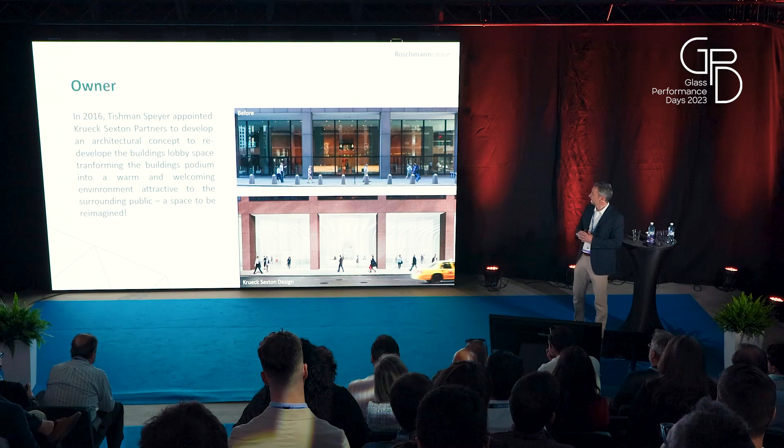So that's why they wanted to get it opened up. They wanted to get it as transparent as possible in order to get rid of any distraction which may also shade the light which is coming in. So that was their concept. And that was 2016. And 2016 compared to 1987, of course, from a material point of view, we do have different technologies of how we are getting to the point of creating those spaces with the least of the materials.

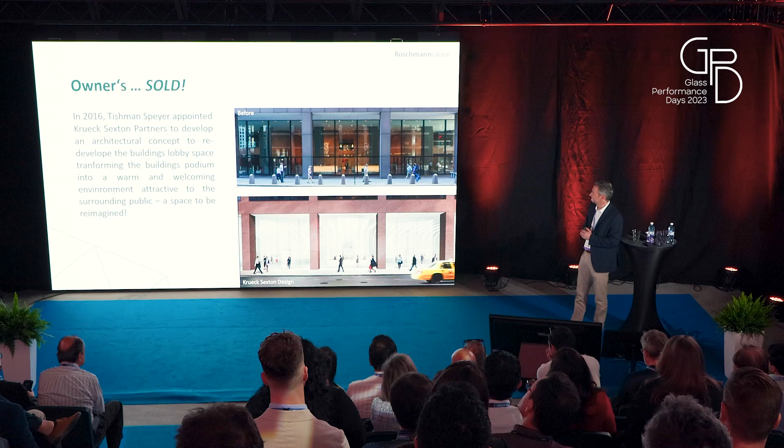He wanted to have a flow of public traffic going through the building and actually also using that space in that lobby as a collaboration space in order to get people into that lobby and collaborate rather than going up into the offices, but collaborate right at street level in order to have a space which can be used for several purposes.

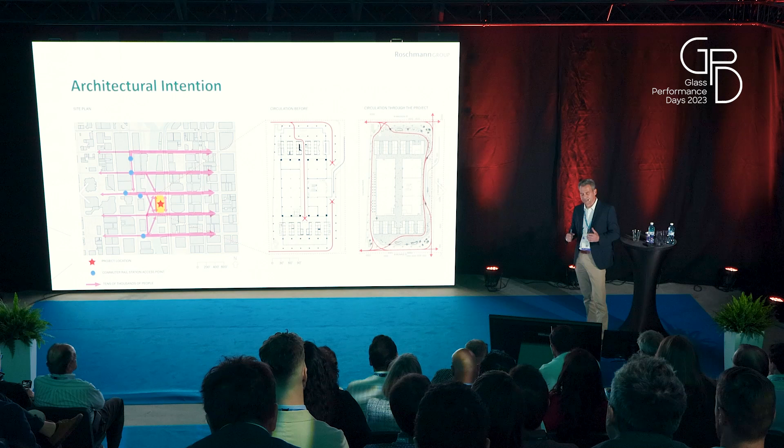So, the architectural design criteria which has been set was starting with a storefront which was not straight but kind of curved in order to create vibrance around that building. So this vibrance is pulling the people who are walking around that building closer to the building where it is becoming more attractive. So they were using curves in order to create this kind of shape.

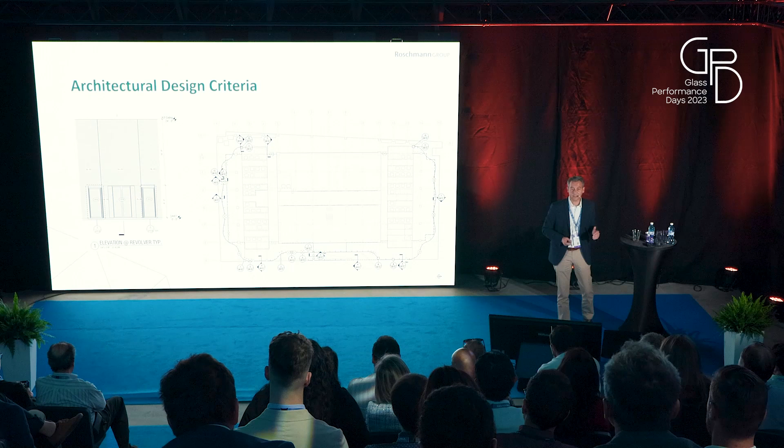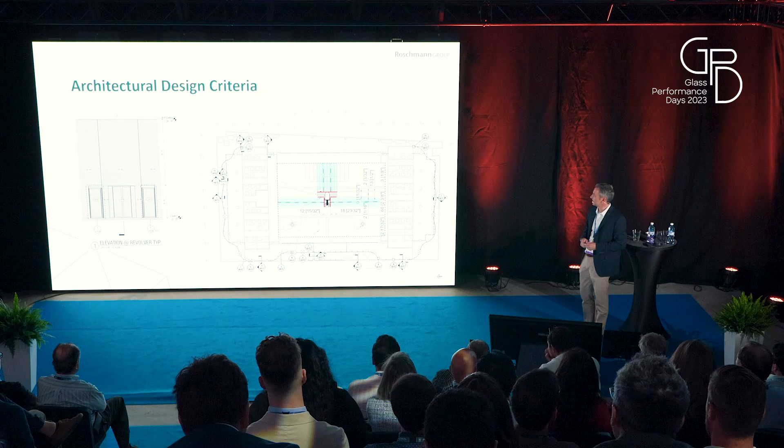Then secondly, they wanted to have floor-to-ceiling glazing, in order to get rid of all these distractions. They wanted to have floor-to-ceiling glazing, which was spanning a height of 24 foot, which is 7.3 meters. And then they wanted to have as little material distraction as possible. So they created a concept of not using any aluminum or steel mullions. They wanted to have a true structurally bonded component, which is creating that support structure for that front vision glass.

So what you do normally, you're starting this in a very early design stage with a design assist or a PCSA, depending on where you are, and you're taking a look at what can we do with the material and the technology nowadays. So what technology is being given to us in order to achieve this architectural vision. And secondly, how we design the details in order to have the load transfer properly transmitted into the building. So what fabrication technologies are available in order to create this superstructure out of transparent materials, and how to control this from a quality point of view in order to optimize the processes.

So first of all, just going backwards, we talk about bent glazing in that particular way in order to create this curvy line. So if we are talking about bent glazing, we need to take a step back and understand what bent glazing actually means. How can I bend a glass continuously, making sure that I do have the technology which is given to me in order to let this facade perform.

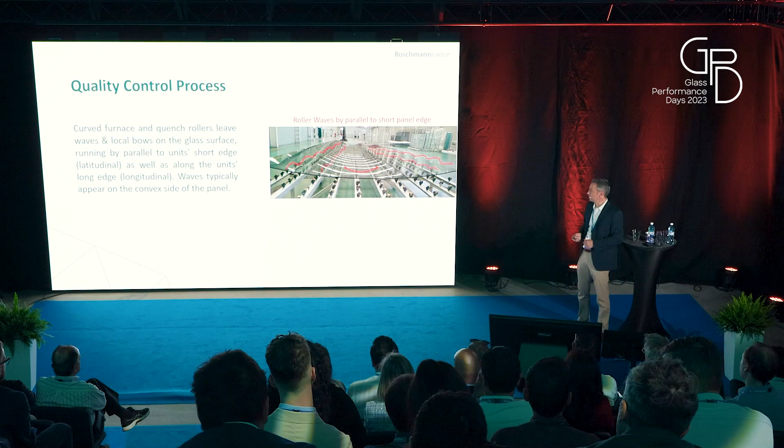In addition to those, in temper bent glass, I have another direction of roller waves, which appear parallel to the long edge, because I have a tempering furnace and a quench, which is mechanically bending the glass and pushing the glass back and forth, which creates another roller wave parallel to the long edge of the glass, creating another distraction on the glass surface. That's a problem because that's also very difficult to measure. That's very difficult to check from a quality point of view.

And that's also why it is so important to create benchmark units in order to see and track this kind of quality measurement process. Especially if we are talking about large glass, bent glass, temper bent glass, we are missing standards and codes. So every time we are missing standards and codes, what are we doing to benchmark the quality? Because we want to create a kind of quality benchmark. We are creating benchmark units, full size, in order to set the baseline for the quality.

So these benchmark units are visual mock-up units on one hand, but really quality benchmark units, which are creating a worst case for the quality of the glass of the production for the project. And this is in relation to local and overall bows, latitudinal and longitudinal roller waves, curvature, radius tolerances, laminated edge offsets, and uneven anisotropy clouds.

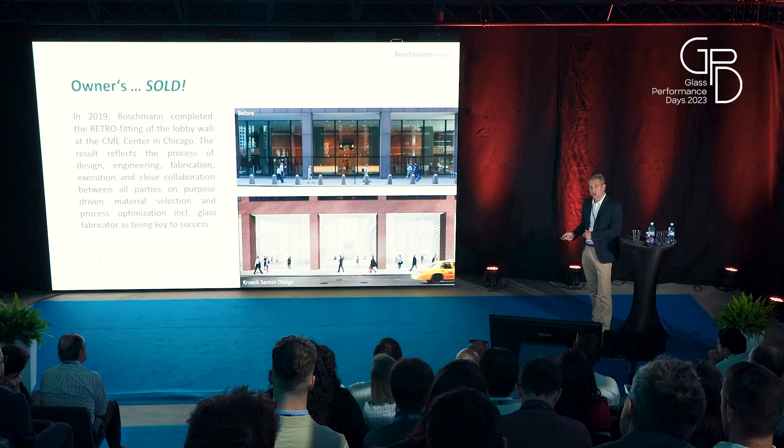So, coming back to what has been sold to the owner. This has been sold to the owner, right? This is the architectural rendering. And only in close collaboration with all parties, all stakeholders, especially the glass fabricator, was it possible to turn this image into reality, where this is the built storefront or lobby glazing, which is very similar to what the architect as well as the owner had in mind.

So that goes from owner sold to, this is so funny. That goes from owner sold to owner delivered, because that's what we want, right? We really want to deliver a good product with the technology which is given to us nowadays.

And these before and after pictures, I love them, because that one was the lobby before, dark, creating a not so nice environment. And this is the lobby nowadays, where it is creating a space for collaboration. So people don't necessarily need to go up into the offices. They can meet downstairs and pull the public environment into the building as well. So this is how it looks.

That was a retrofit approach to an existing architecture, to an existing building in a dense area. And this opens the market not only to recycle materials, but also to reimagine the architecture which is built. Thank you.